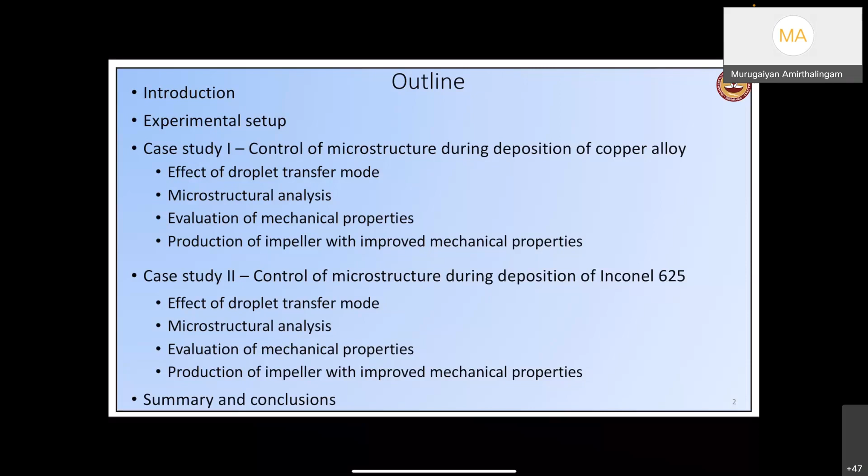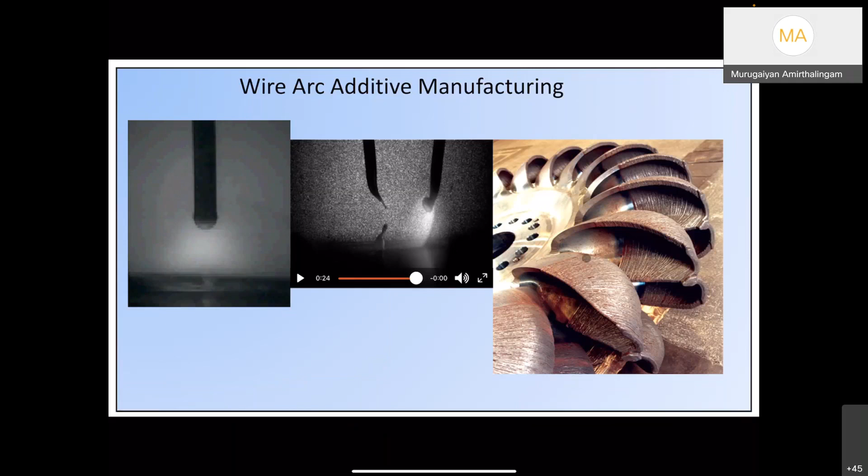So as I said, in wire arc additive manufacturing, we use a welding torch, a conventional welding torch, to produce components. It can be a gas metal arc based process, or even a gas tungsten arc weld process with external filler additions. So we can add external wire and the arc heat melts the wire, and that can be deposited layer by layer.

And multiple times the weld beads visualize to fabricate the net shaped component. In most cases, we use a dual wire to achieve even higher productivity and functionalize the compositions as we build layer by layer. So the main learning is that wire arc additive manufacturing uses a simple welding torch to build layer by layer, so that components can be fabricated using wire as a feedstock.

As in the case of gas metal arc welding, the wire itself melts and also acts as an electrode. In gas tungsten arc welding, we add external filler, and that melts and gets deposited.

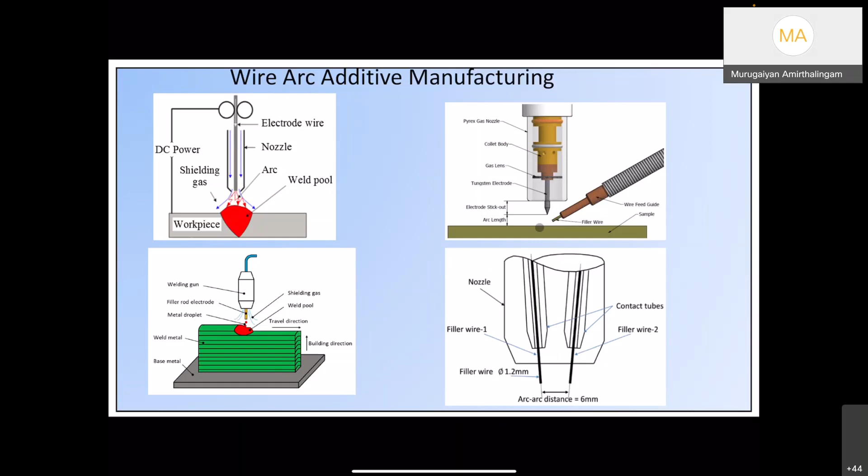Good. So the process as such, wire arc additive manufacturing, is not a new process. It's been considered to produce prototypes, especially large volume alloy prototypes, from even the 70s. One classic example I show here is a simple rocket nozzle made using titanium, one of the first applications of this conversion of welding into additive manufacturing.

It happened in the early 80s in the UK, where they converted the welding process into a net-shaped component fabrication technique by layer deposition of weld beads, so that the CAD drawing can be visualized into a full-fledged component. In the later 90s and early 2000s, a lot of research went into producing a near net-shaped component from welding deposition.

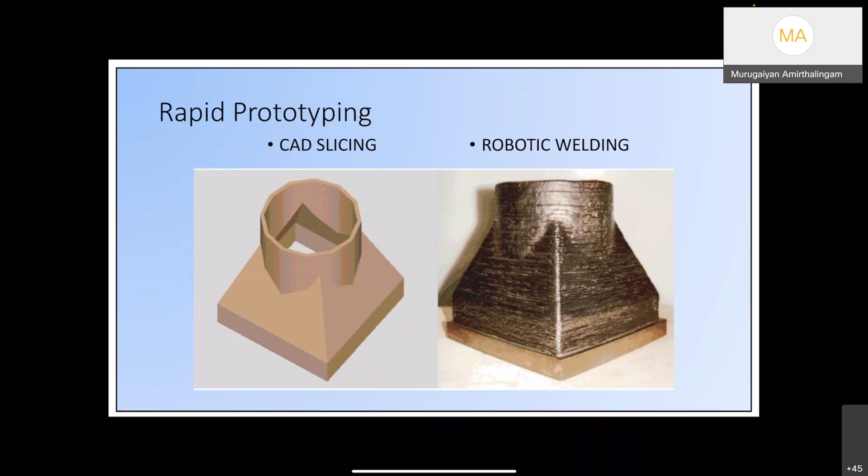And now wire arc additive manufacturing has developed to the stage where components are fabricated regularly and also used in service applications. For example, one of the components we printed at IIT Madras is for impeller applications.

And these components, if we don't control the microstructure evolution, would invariably possess differences in mechanical properties as a function of direction. If you just start depositing like simple weld beads, you may get the final shape of the component after post-processing machining. But then when we actually use this component in service, the properties are not as good as the conventionally made component, isn't it?

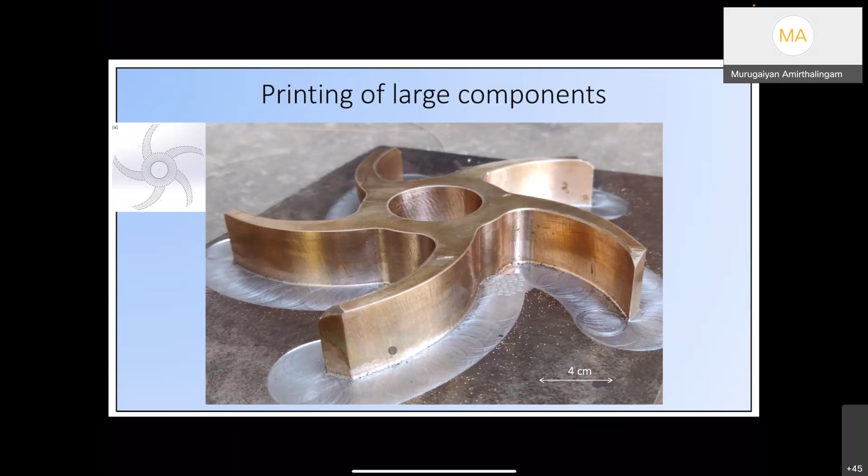So the moment you use this impeller in service, it will just crack, much lower the service time than the conventionally made component. So then what is the purpose of using this? If a component is going to fail prematurely, then the technique we use may not be suitable for applications, isn't it? So therefore we'll have to understand how we can improve the mechanical properties, especially the anisotropy we observe. That's what I'm going to talk about in subsequent slides.

So what material can we use in wire arc additive manufacturing? The thumb rule is, any material that is weldable, we can also use to fabricate the component. Suppose you want to use a material where the weldability is reasonably good, we can use that material in either gas metal arc welding or gas tungsten arc welding with filler additions, and we can make a component out of it.

So here it is not like just changing the wire at this point. We can also gradually change it, so you start with the nickel wire, and then as you reach the interface, you slowly change the composition so it becomes, say, nickel 10% copper, nickel 20% copper, and ultimately 100% copper. Similarly, you can smoothly vary the composition by changing the melting rate, so we can get a nice functionally graded material as well.

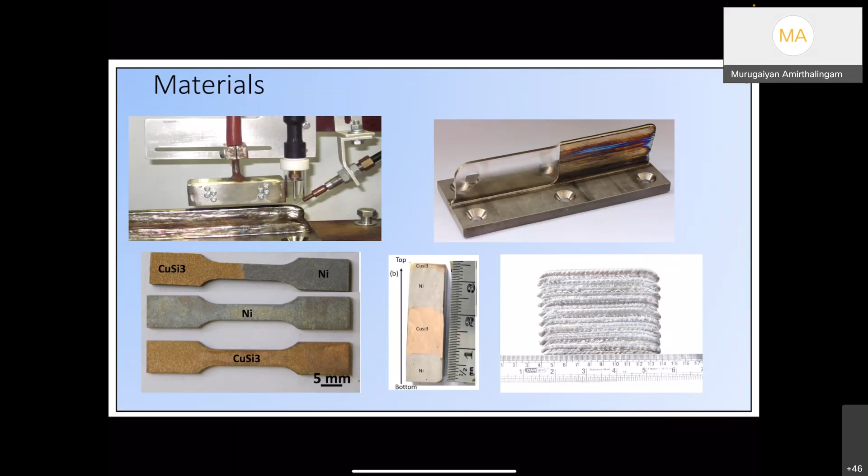So any material that is weldable, we can make use of it during additive manufacturing. What system do we use? A conventional welding system can be made use of, but we need to do some tricks, because when you get a CAD drawing, we first have to slice it and arrive at the proper path planning. Once the path planning is ready, we can move the welding torch in the directions needed to create the final component.

The simple hardware we use is a welding power source and a robotic arm, where the torch can be mounted onto the robotic arm, along with a controller. The path planning exercise generates the motion codes given to the robotic arm, and the weld deposition can be made to produce the final component.

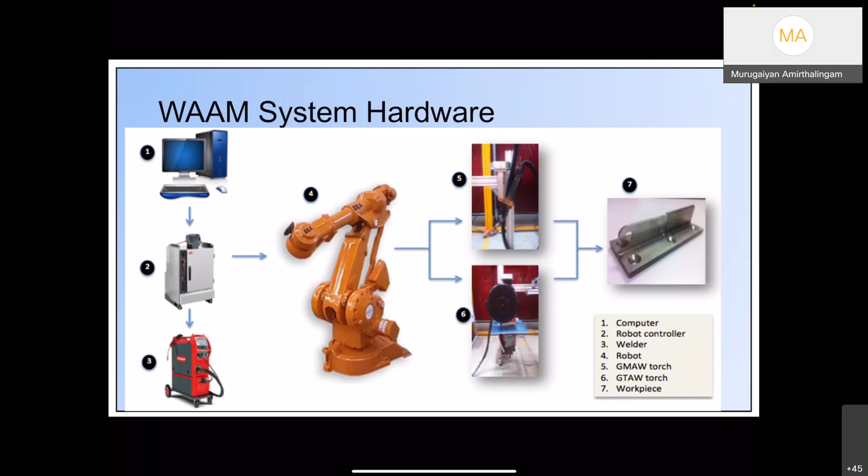The welding torch can be a gas metal arc welding torch or a gas tungsten arc torch with filler—both can be used, and we can optimize the bead dimensions. So this is the basic of wire arc additive manufacturing.

Now, the problem I talked about—the anisotropy in mechanical properties in additively manufactured components—persists for any additive manufacturing process. When we use alloys that have a tendency for directional solidification, or in metallurgical terms planar solidification, we expect inhomogeneous mechanical properties.

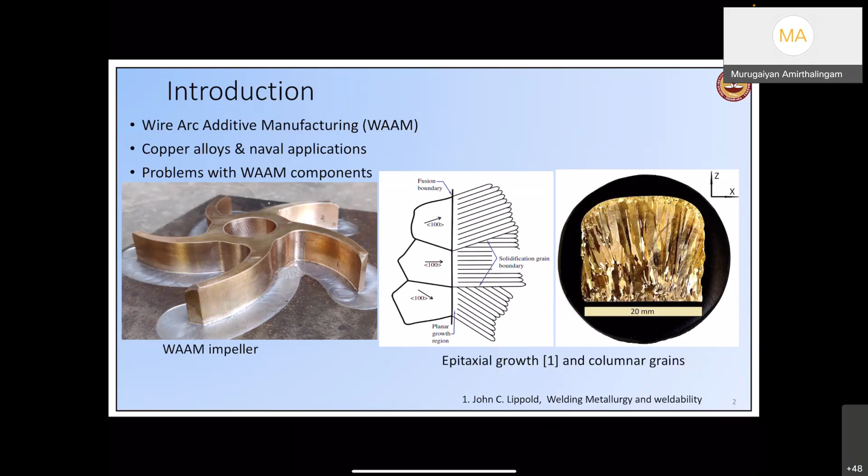So if you deposit just like that and use that component, it's going to crack, because conventionally these impellers are made using forging, which gives an equiaxed microstructure like the one shown here. This shown microstructure is not a forged microstructure—it is an additively manufactured one. By doing some tricks, we can also achieve such a microstructure.

So we need to convert the microstructure, what you see over here in a directional manner, into microstructure what you generally see in a forged component or in a rolled and annealed microstructure where we have very nice equiaxed grains.

So then how do we change this from here to here? Then we'll have to go back to the fundamentals. Ideally, in a weld pool when a liquid solidifies, even water when it freezes, the microstructure it forms is controlled by two important parameters: the temperature gradient at the solid-liquid interface and the rate at which the solidification is progressing.

So if you freeze water, sometimes you see very clear ice cubes, isn't it? Sometimes you see opaque ice cubes. So why is the difference?

The difference is the prevailing temperature gradients inside the water when it actually solidifies. If the water freezes in a dendritic manner, if dendrites are forming when the ice crystals are formed, you get an opaque ice cube. If it is solidifying in a planar manner, you get a very crystal clear ice cube.

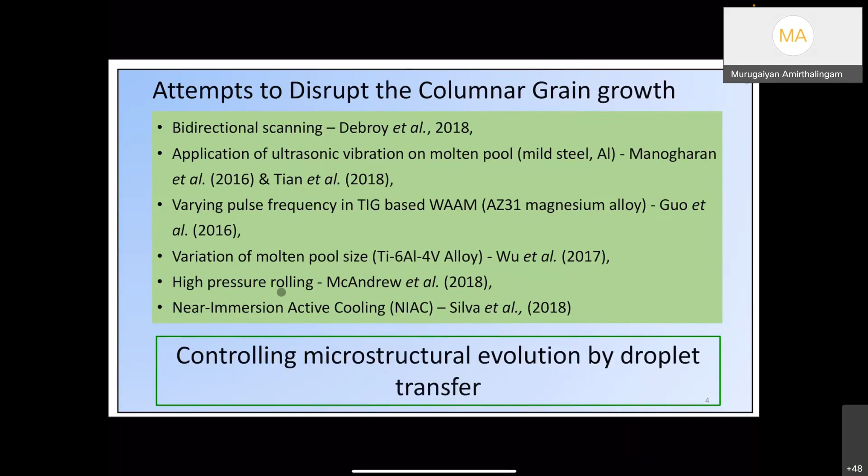People have attempted several methods, like changing the scanning strategies or introducing vibrations, so that we introduce more nucleations, or various other methods to manipulate the temperature gradient. But I'm going to tell you one neat technique, how we have done it and how it can be done, and people are adapting this technique as well. This is the system we use at IIT Madras for additive manufacturing.

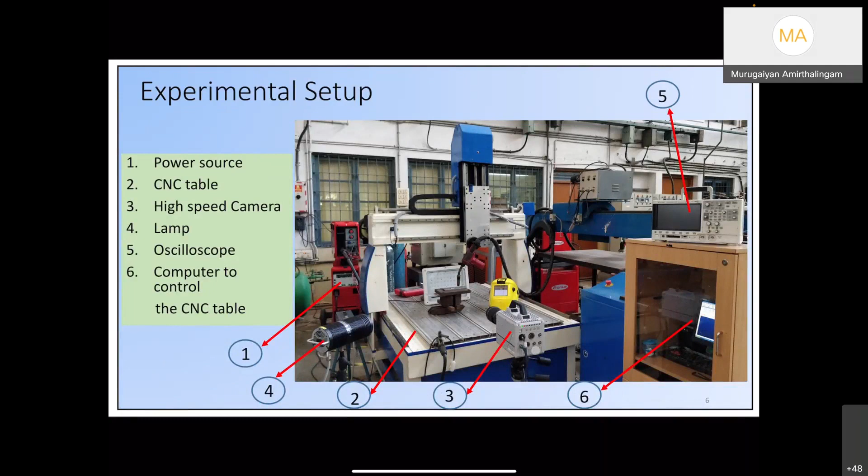This is a simple CNC table. We don't use a robotic arm because a robotic arm has some disadvantages compared to the CNC table. Now we can also understand how the deposition happens with all these sensors and measurements attached to it. So I'm going to tell you one case study in copper, how the microstructure can be manipulated.

So what we do in additive manufacturing is deposit layer by layer. We follow along this X direction, we move the torch, weaving it in the welding term in the X direction, and then one bead is completed. Then we come back, go from here to here, and continuously build a thin wall deposition.

So what happens? In the welding case, the current-voltage waveform we use is one of the important factors, because we know that the metal transfer—when the consumable material melts and deposits—the actual temperature of the weld pool and the droplet which is transferred is determined by the current-voltage waveforms we use, isn't it?

So in any arc welding case, we can use constant current, or we can also use a pulsing current where one pulse of current leads to the detachment of one droplet. There are some other methodologies we can also use to detach the droplet from the consumable wire into the molten pool.

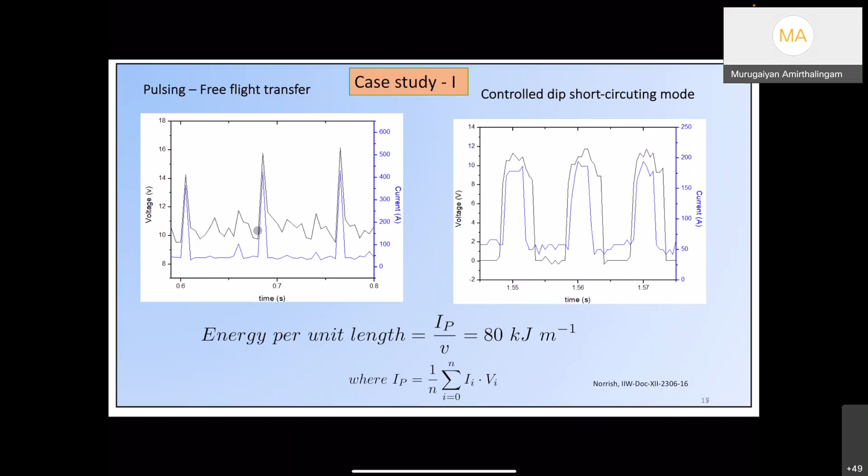Why? Because in this case, when we use a pulsing waveform, what we actually do is give current pulses to create a high energy density arc during every current pulsing, and that ensures that the tip of the consumable melts and gets deposited.

Whereas in this case, the pulsing current we use to strike an arc would be much lower than in the previous case—about 500 amperes in the pulsing case. Here we give 200 amperes current, just enough to melt.

And then when the dipping event takes place, what we can also do is transfer the droplet at much lower temperatures. So what does that indicate? When this transfer takes place, the top and bottom surface temperature of the molten pool would be more or less the same, or just a small difference.

You can now correlate this with the graph I showed you. In one case we have a steeper temperature gradient, in another case a shallow temperature gradient. Moreover, this wire is dipping, and it's a cold wire, so during this process it can extract some heat from the molten pool to minimize the temperature gradient.

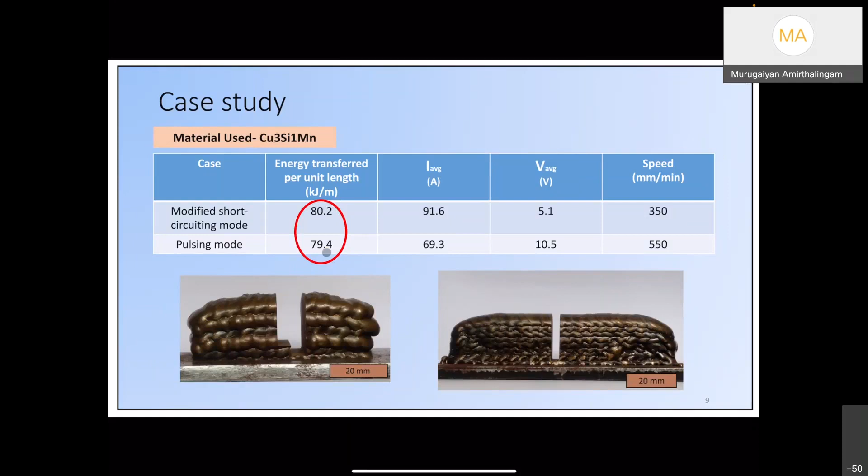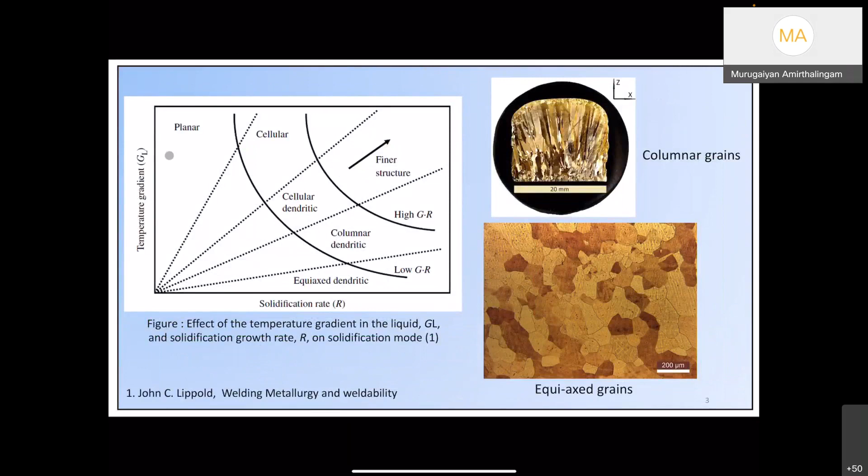In pulsing mode, based on the high-speed video and explanation, we have a steeper temperature gradient. When the temperature gradient is steeper, we tend to grow the crystals, or microstructure in metallurgical terms, in a planar way. That's what we looked at in the graph—when the temperature gradient is steeper, the microstructure becomes planar.

In the other case, if you have a shallow temperature gradient, you may expect a change in the microstructure. How it changes, we'll see in the next slide.

When you look at this deposition, obviously this is not good. This is what primarily happens in additive manufacturing, especially with laser and powder or laser and wire deposition. You are depositing on a substrate, and the substrate is at much lower temperature—technically room temperature.

If you are cooling with effective heat transfer, when you drop a layer of molten liquid, the temperature difference between the bottom surface and top surface would be huge. The top surface will be well above melting point, whereas the bottom surface is in a solid state, much lower. So the temperature difference will be much higher, leading all the time to planar solidification.

So the microstructure would be like what is shown here, and that is a problem. We cannot use this microstructure in real life—when you pull it in tensile mode or apply a fatigue load, this is going to crack. It will fail prematurely compared to, say, a forged, rolled, or annealed component.

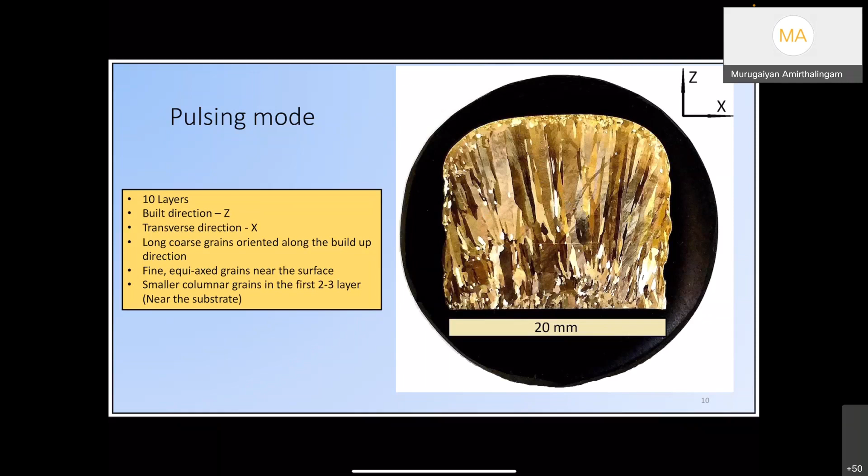You can also see the microstructure development—layer by layer, this is one-pass layer. When we solidify, we also slightly melt the previous layer, and the grains grow with the steeper temperature gradient in a planar mode by inheriting the parent microstructure orientation. In metallurgy, we call this the cube edge direction, the 100 direction—no need to worry about the detail, but it inherits the orientation and grows along this direction.

When we don't control anything and just deposit in conventional pulsing gas metal arc welding, you see this columnar microstructure—a directionally solidified dendritic microstructure. It's like plywood, where you see wood fibers oriented in one direction. That's what we call an anisotropic microstructure, and the properties would differ if you apply a load along this direction versus perpendicular to the fiber direction.

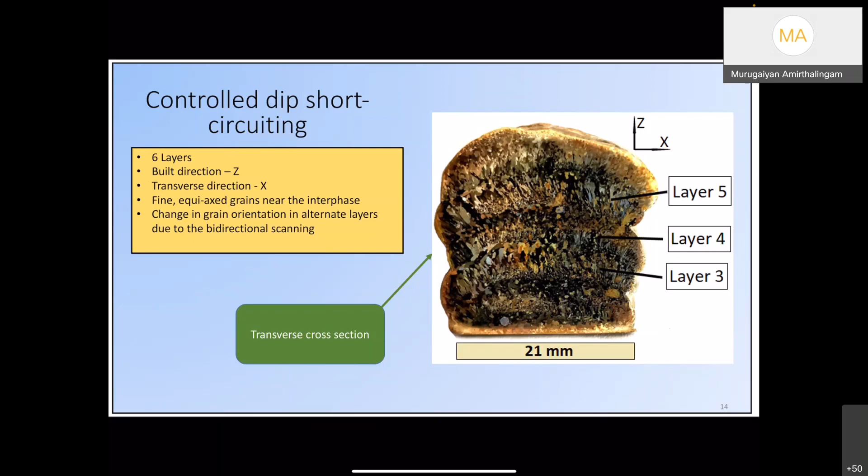But by changing the metal transfer mode, we can clearly see the change in microstructure—from columnar solidification, because we now change the temperature gradient during solidification into a shallow temperature gradient, by changing how the metal is transferred and optimizing the current to a much lower level so the top and bottom temperature differences are minimal. That leads to a complete change in microstructure—compared to before, we now have more of an equiaxed microstructure.

So this is the striking difference we can observe by changing the fundamental mechanism by which the molten droplets are transferred. And how do we get that? By understanding the science behind it, the science behind the microstructure evolution, isn't it?

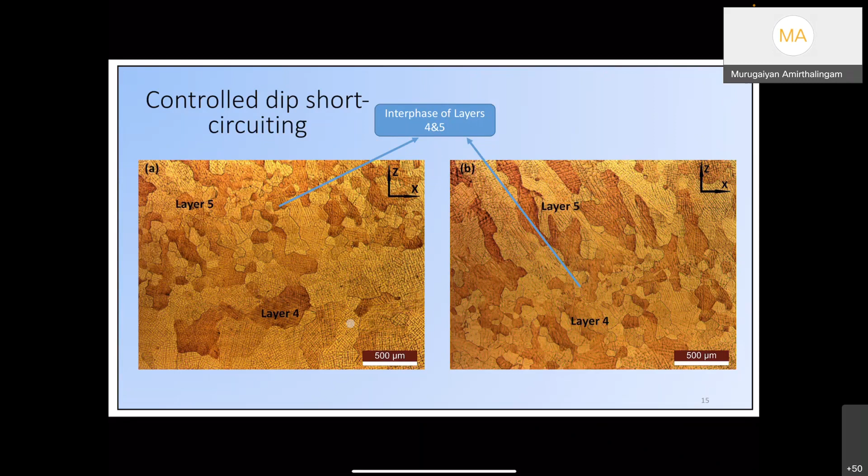So now we see here, the microstructure we get is an equiaxed dendrite microstructure, and the microstructure is as good as any forged microstructure. The forged microstructure in a conventional way would appear similar, and that would also be reflecting in the mechanical properties. So when we look at the mechanical properties, we expect that this would perform better. So how do we achieve it?

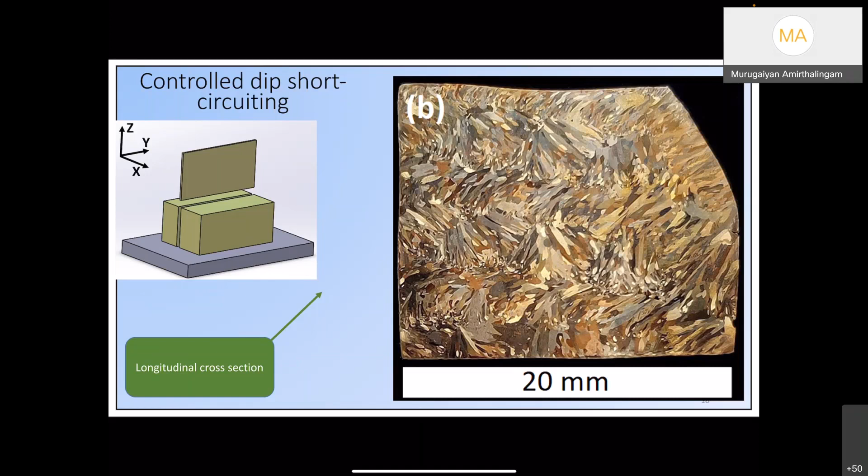If you go deeper and take the cross section like this, whenever there is a dipping event, there is more nucleation because of the undercooling provided by the wire dipping. In the previous case, growth goes from the layer substrate or layer bottom along the heat extraction direction, and we break that growth by this dipping event. The change in temperature gradient also leads to bidirectional growth, from bottom to top and top to bottom, so that now we get a very fine and equiaxed microstructure, as seen in this slide.

Okay, so that's what we can achieve by various strategies. And what happens in a conventional way? As I said, in a conventional way, because of the steeper temperature gradient prevailing along the heat extraction direction, the grains grow in a columnar way.

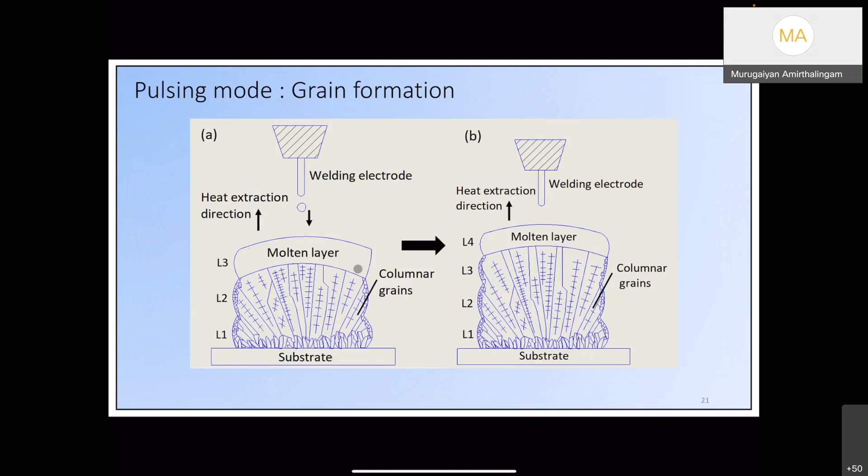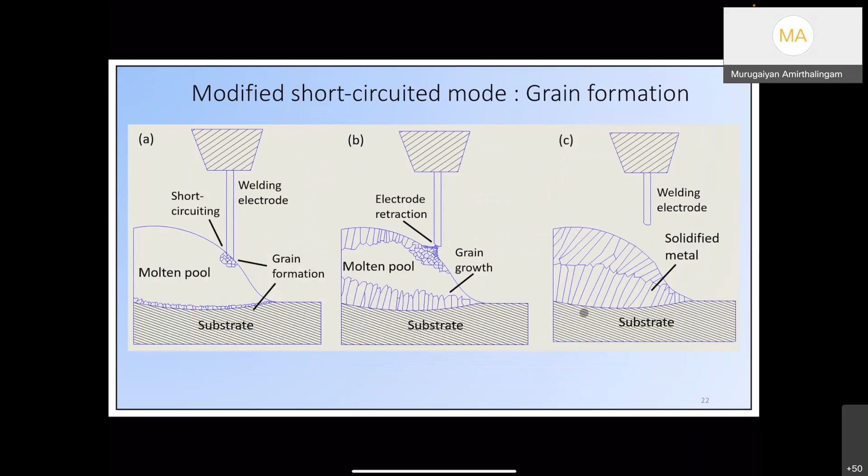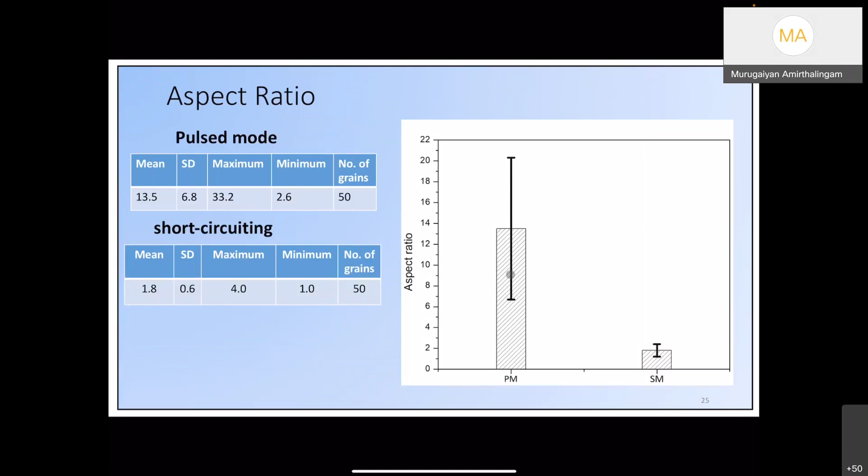When we have short circuiting or a change in the current-voltage waveform with metal transfer, we have a shallow temperature gradient to begin with, and also during the dipping event we change the nucleation event so the grains become much finer, and we break the growth of grains along the heat extraction direction. So certainly the grain aspect ratio, the equiaxed nature of the grain, changes in a pulsed mode compared to a short circuiting mode, and we get a much finer microstructure in the second case.

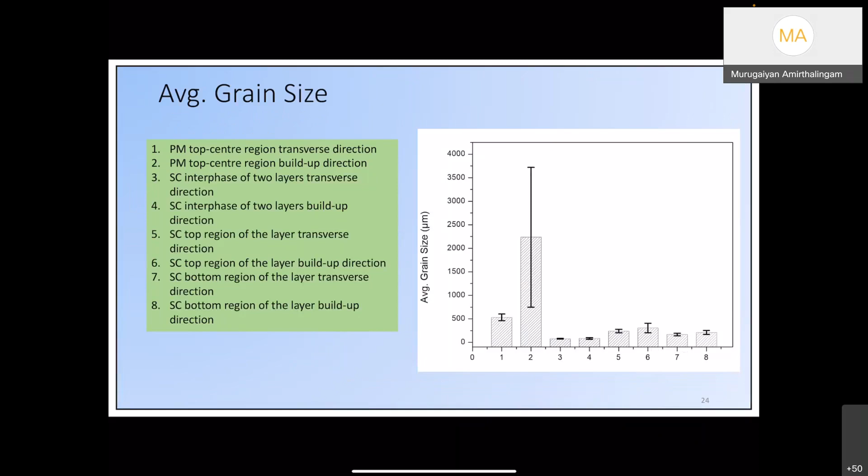We understood how the microstructure evolves, and then we controlled the mechanisms so that we can engineer the microstructure, isn't it? So when you do tensile testing in conventional pulsed gas metal arc welding, the mechanical properties are different in different directions.

So if you take the longitudinal direction, the component would exhibit less strength and ductility, whereas in the other direction you may get good strength and ductility, but then you have a problem, isn't it? That is the inhomogeneity, the anisotropy we talk about. Whereas in the equiaxed microstructure, the mechanical properties are homogeneous - any direction you take, you have similar properties.

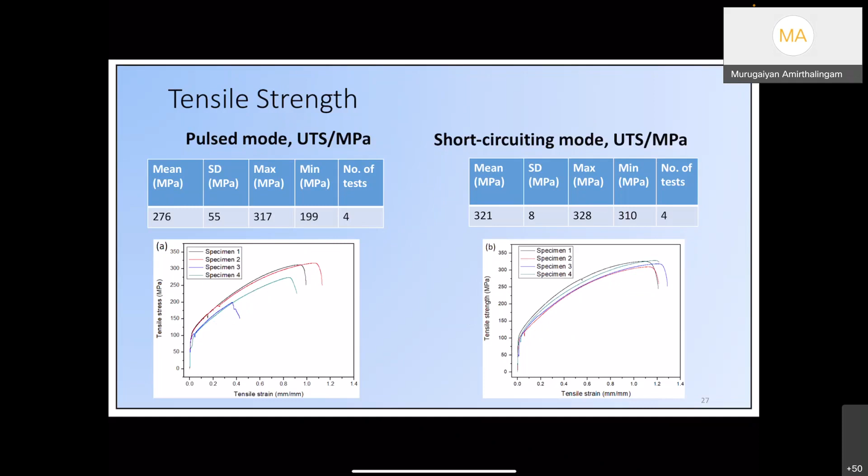And if we use this method, or this metal transfer behavior, for fabricating the final component, it would not survive. So now we change it so that the mechanical properties are better. That's the lesson you want to take - by understanding the physics, it is important to understand the science behind the process so that we can manipulate and achieve good properties.

If you don't do that, you cannot just go and print and then use the component - it will fail. Then people will question why you need to go for additive manufacturing, because the conventionally made components are much better than the additive manufactured component. If that is the case, then what is the need of additive manufacturing? So unless we address these issues, like I showed you, the use of additive manufacturing cannot be enhanced.

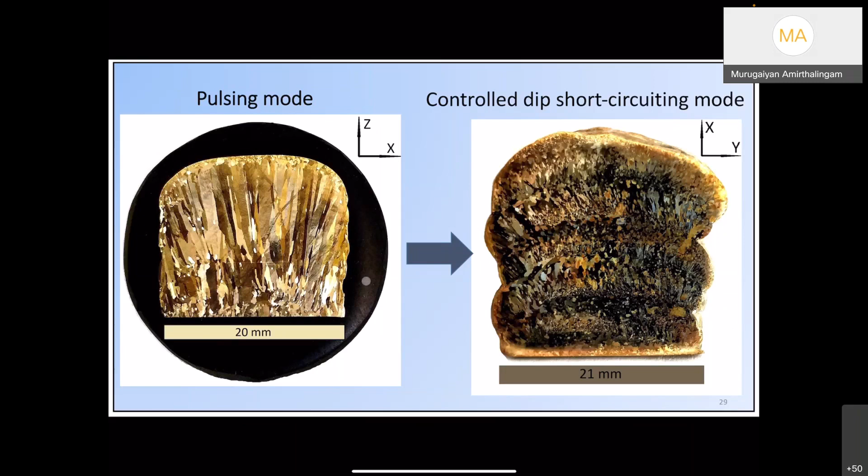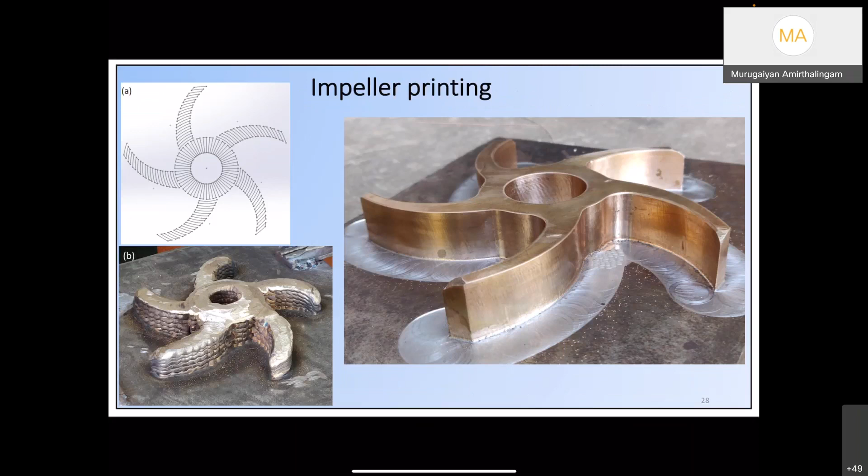Good, so this is one of the first microstructure-engineered components which we developed for Indian Navy. It is actually now used in applications. So this is the as-deposited component after the surface finish - you get a nice component. Any questions so far?

Otherwise, now we can go to the second case study. Anyway, we'll take the questions at the end. Not a problem. So in another application, we'll have to get a microstructure exactly opposite to what we have seen in the copper.

Superalloys, Inconel, for example Inconel 625, are actually widely used in high temperature applications and high corrosion applications, isn't it? So in these alloys, we need to get a directionally solidified microstructure, opposite to what we achieved.

So what do we do? We can manipulate the current voltage waveforms and the metal transfer behavior to get a good columnar microstructure. We go back to the drawing board to understand what waveforms give us a shallow or steeper temperature gradient, arrive at the optimal current voltage waveforms, and understand how the waveforms influence the arc energy, and subsequently how we can achieve the microstructure we want.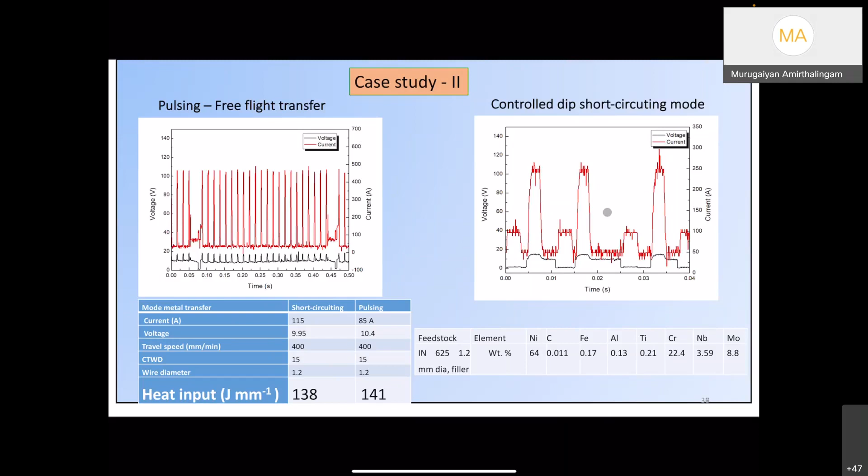This is beneficial because this coarse grained directionally solidified microstructure is widely preferred for creep applications and high temperature applications, because it serves better. If you have a low grain boundary area, it's better for high temperature properties.

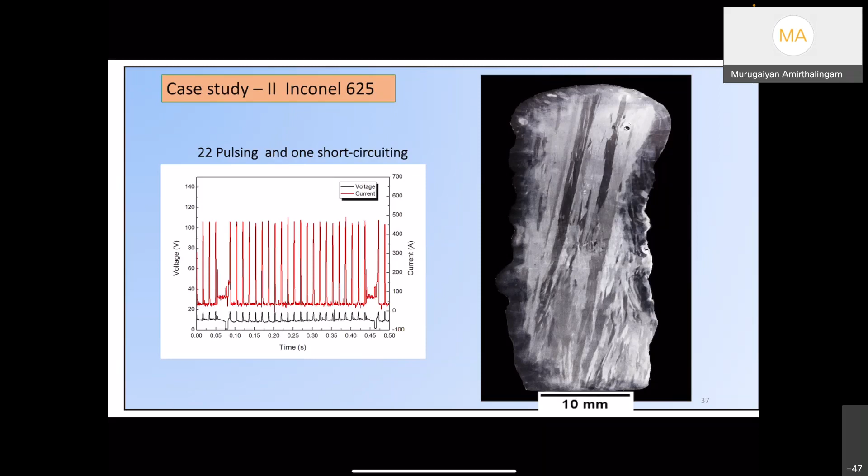So we can go back to the science of it to understand how the microstructure can be manipulated so that we get the required mechanical properties. The waveform shown here was invented by us so that the microstructure we get would meet the in-service demand. So what is the in-service demand in this case?

When we make a propeller using Inconel 625, that propeller for a gas turbine operates at elevated temperatures, and we generally want a directionally solidified microstructure for it. Why? Because the mechanical properties along the length of the propeller should be much better than in any other direction. By inventing this waveform and manipulating the prevailing temperature gradients and solidification rates, we can get a microstructure that is directionally solidified, as shown here.

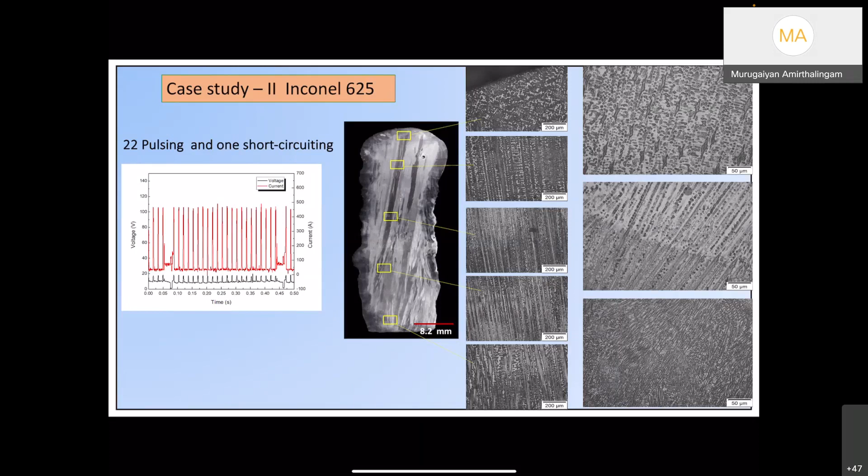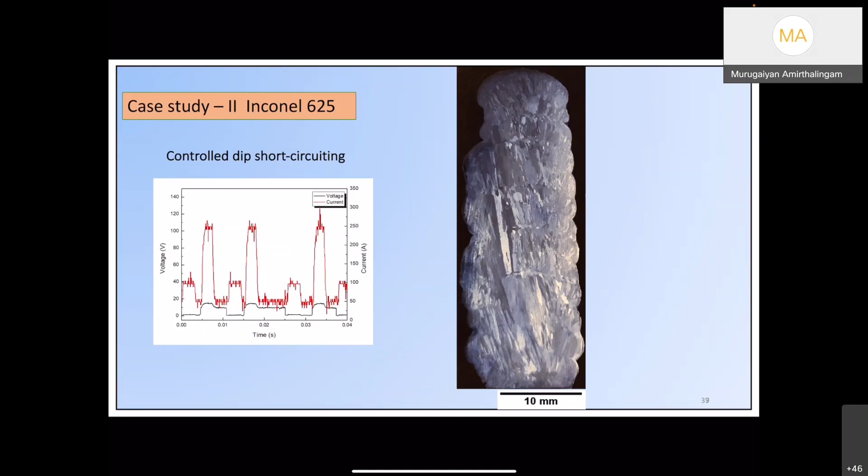If you change the current voltage waveform, despite keeping the same arc energy heat input, the microstructure may not be directionally solidified. So what we need to understand is that the current voltage waveform and the metal transfer we carry out can significantly influence the microstructure evolution. If the current voltage waveforms are changed, the microstructure can significantly differ, by the fundamental principles I described.

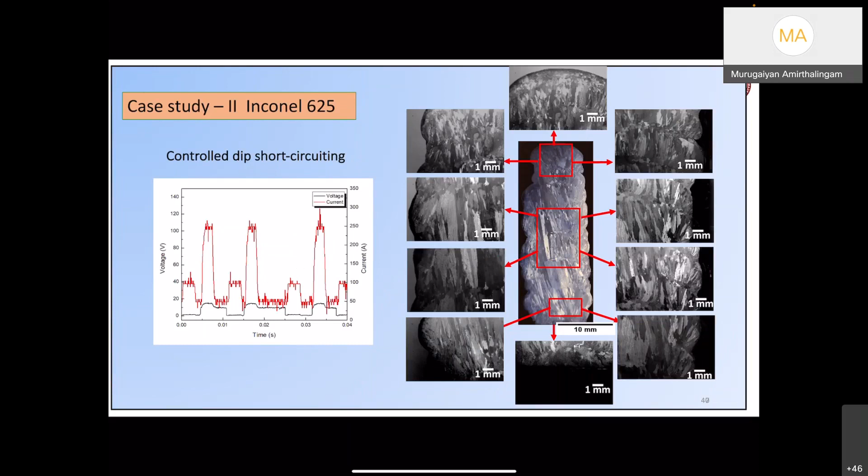So what is the summary of this talk? We'll have interaction for maybe the next 5 to 10 minutes. Understanding the physics of the process is very, very critical. You cannot just go and do additive manufacturing or 3D printing and expect that a component is going to survive. It will not.

Unless you control the microstructure and the process parameters in such a way that the components we make in 3D printing would exceed even the conventionally made component's performance. I gave several examples, right? For a forging tool, if you decide to make it by additive manufacturing and it fails within one use, what is the point in using additive manufacturing?

So the lesson you need to take is: understand the physics of the process so that you can control the microstructures and get the mechanical properties. We show that additively manufactured components outperform conventionally made components in mechanical service because of the controlled microstructure we can generate with very fine equiaxed grains. So the additive manufacturing becomes attractive, and we also gain the advantage of directly printing from the CAD drawing.

We can also introduce complex design modifications, and we can introduce channels for cooling, for example, to improve performance in cases exposed to higher temperatures. We can also give functional gradation as it grows. So all these advantages, plus we can also get better mechanical properties using additive manufacturing.

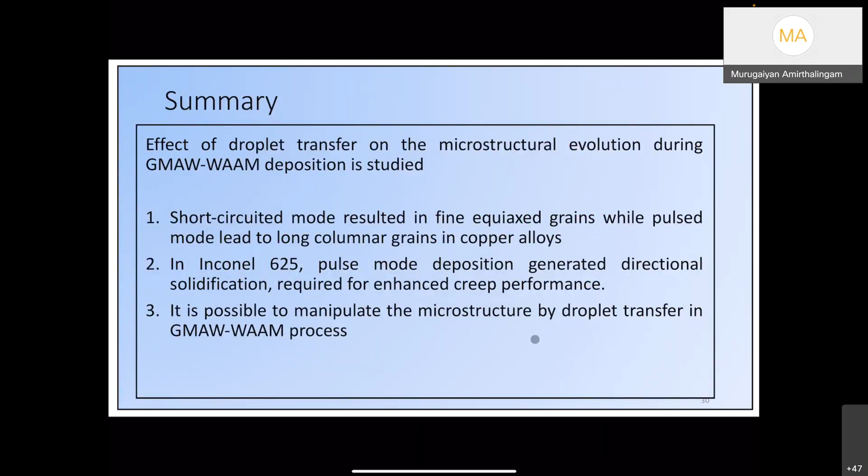Thank you for the wonderful session on wire arc additive manufacturing. Most people thinking about additive manufacturing are just thinking about how to make it in a simple way, and you are very well aware that when you go for metal additive manufacturing, it costs mostly in crores, and people want to know more about how to make customized parts, like how wire arc additive manufacturing can be given better exposure.

There's a question in the chat box: which type of machine or process is used for machining contour surfaces?

So here we use a simple milling machine. Hold on, I'm losing my battery. Yeah, so the technique we use is simple milling.

For complex closed contours, we are also developing various techniques. I'm not a mechanical engineer myself, so my colleagues in the mechanical department collaborate with me. We are working on electrochemical fluid machining for inner chambers, and also developing new techniques using electro-plasma machining, where electrochemical methods can polish surfaces, especially for closed contours. A couple of my PhD students along with mechanical colleagues are currently working on this.